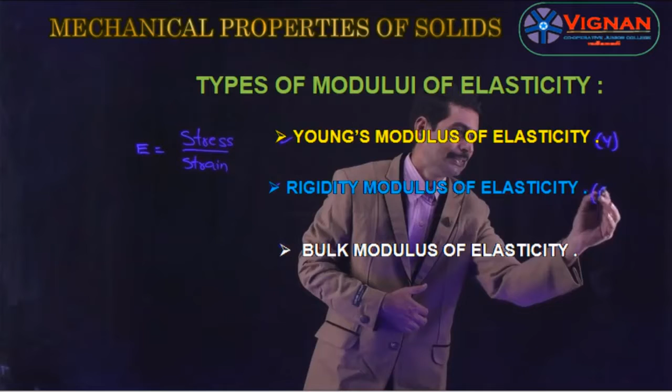There are three types of stress and three types of strain, as we already discussed. Similarly, there are three types of modulus of elasticity: Young's modulus of elasticity, denoted by Y; rigidity modulus of elasticity, denoted by eta; and bulk modulus of elasticity, denoted by B.

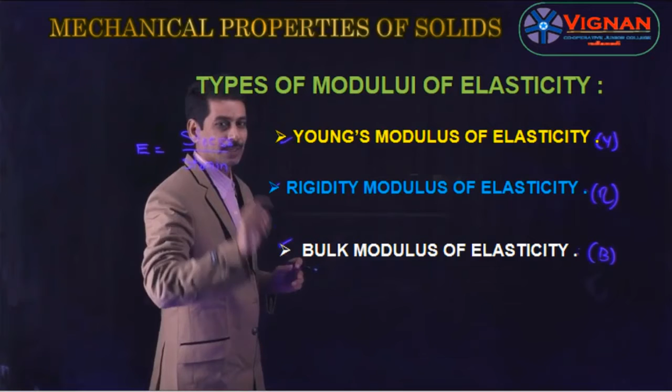Now let us see what is Young's modulus of elasticity, rigidity modulus, and bulk modulus. The first type is Young's modulus of elasticity, defined as the ratio of longitudinal stress to longitudinal strain, denoted by Y. It can also be defined as the longitudinal stress acting per unit longitudinal strain.

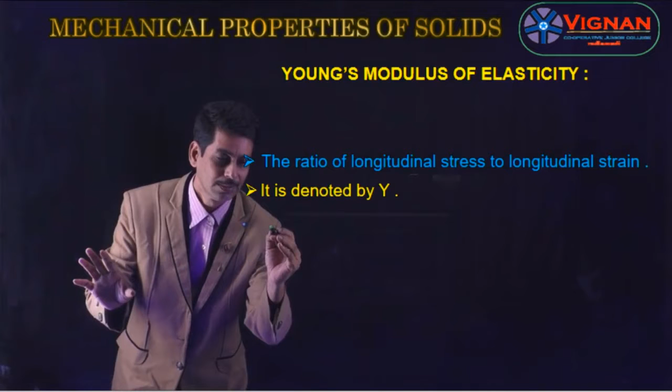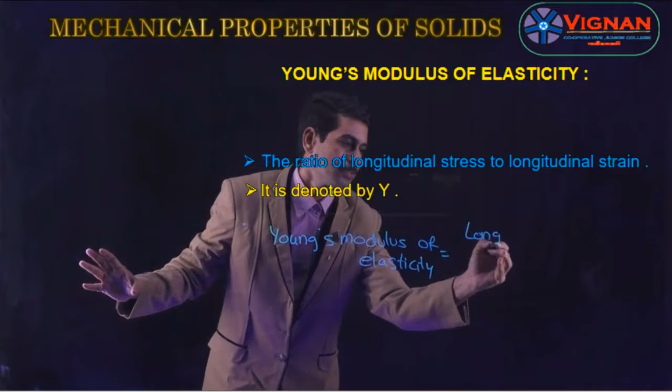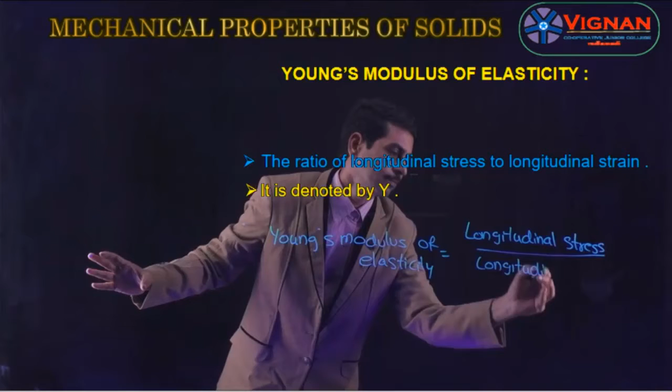So the formula for Young's modulus of elasticity is: Young's modulus of elasticity is equal to the ratio of longitudinal stress to longitudinal strain. This is the expression for Young's modulus.

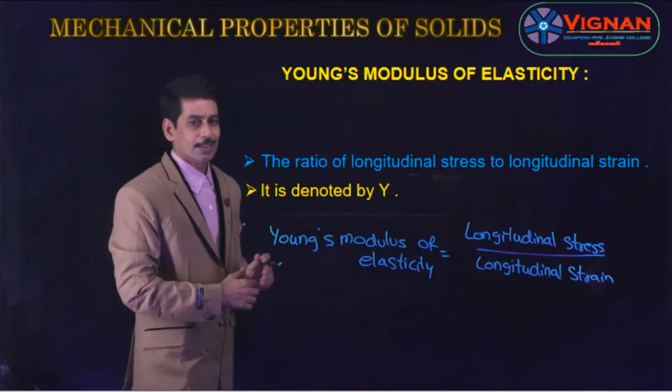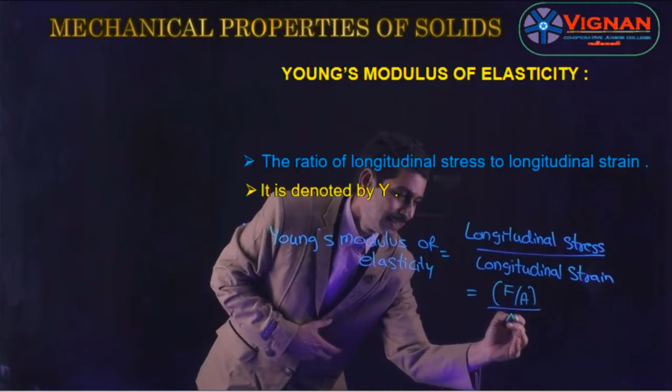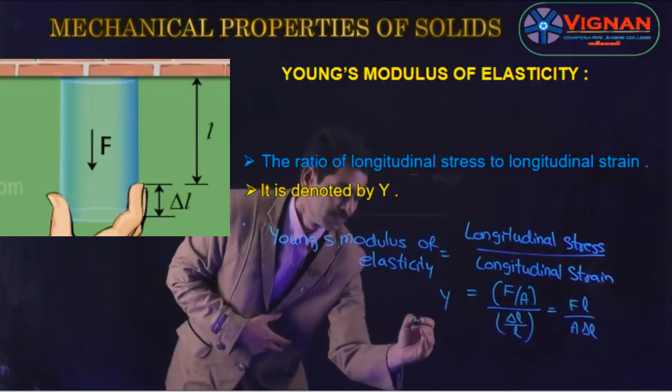Young's modulus of elasticity is longitudinal stress by longitudinal strain. We already learned longitudinal stress is force by area, given as F by A, whereas longitudinal strain is change in length by original length, written as delta L by L. By simplifying it, we get FL by A delta L. So Young's modulus, denoted by Y, is equal to FL by A delta L.

In this expression, F is the force acting on the wire, L is the actual length of the wire, A is the area of cross section of the wire, and delta L is the increased length of the wire. So Young's modulus is defined as the ratio of longitudinal stress to longitudinal strain, denoted by Y, and Y equals FL by A delta L.

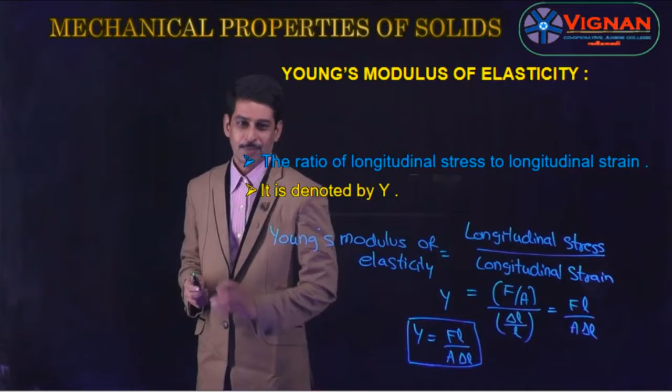In this video we are observing: we apply a force on the wire, where L is the length of the wire, A is the area of cross section of the wire, and delta L is the increased length of the wire.

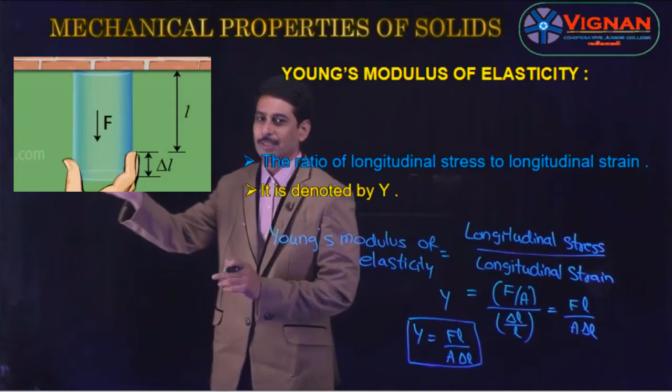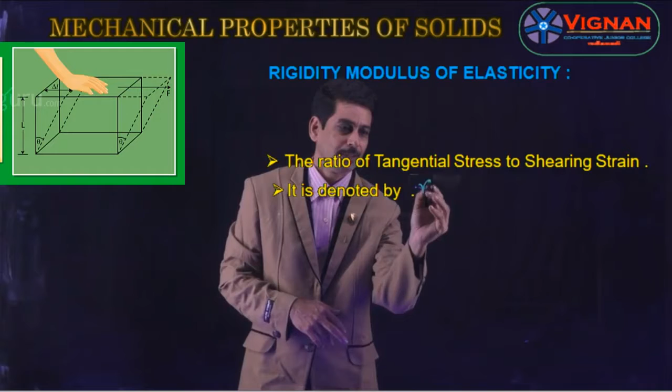The next type of modulus of elasticity is rigidity modulus of elasticity. It is defined as the ratio of tangential stress to shearing strain, and it is denoted by the letter eta.

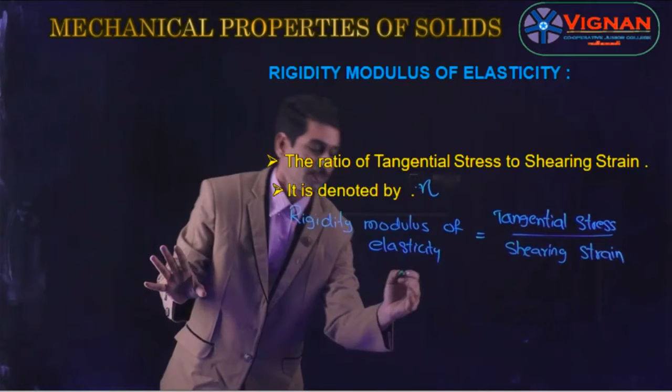The formula is: rigidity modulus of elasticity is equal to the ratio of tangential stress to shearing strain, also called tangential strain, denoted by eta. Tangential stress is given by force by area, whereas shearing strain is given by x by L, which is the ratio of relative displacement to the perpendicular distance between the layers. So we get eta is equal to FL by AX.

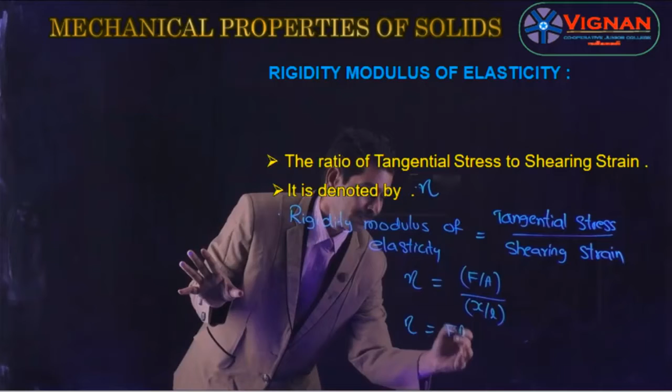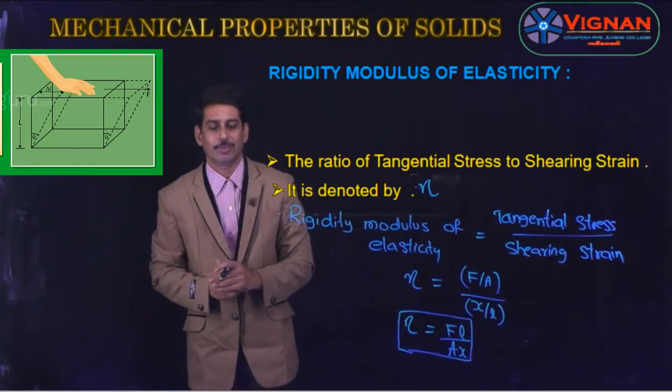This is the expression for rigidity modulus of elasticity. As we see in this video, in this expression eta equals FL by AX, where F is the force acting on the body, L is the length or perpendicular distance, A is the area of cross section, and X is the relative displacement of the body. So rigidity modulus of elasticity is defined as the ratio of tangential stress to shearing strain.

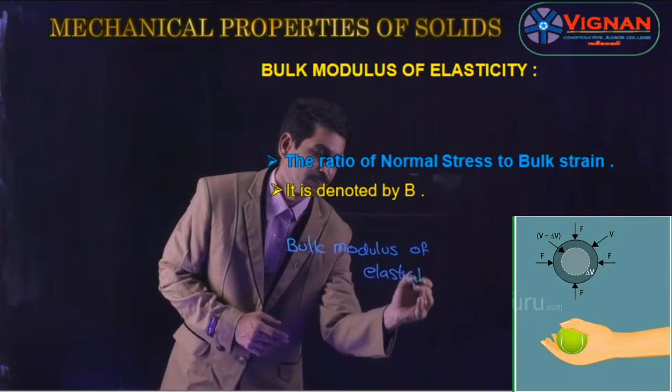The next type of modulus of elasticity is bulk modulus of elasticity. It is defined as the ratio of normal stress to bulk strain, denoted by letter B. The formula is: bulk modulus of elasticity is equal to the ratio of volume stress, also called bulk stress, to bulk strain.

We know that stress is nothing but force by area, whereas strain is delta V by V. But here we get minus because there is a decrease in volume, that's why we get minus. And the bulk modulus is denoted by B, which is nothing but minus.

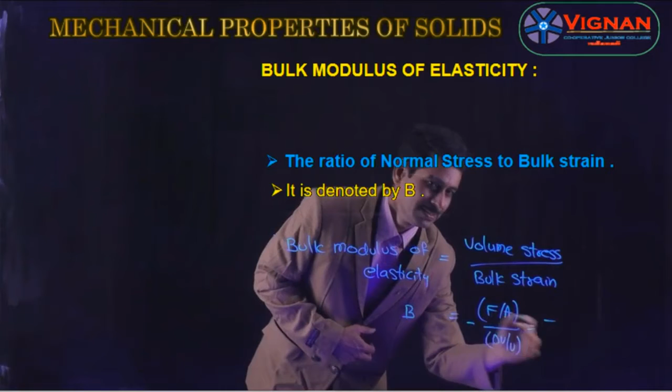So F by A is nothing but pressure, so pressure P, V by delta V. So the bulk modulus of elasticity is given by B equals minus PV by delta V, where the minus indicates that there is a decrease in volume. So this is the expression for bulk modulus of elasticity.

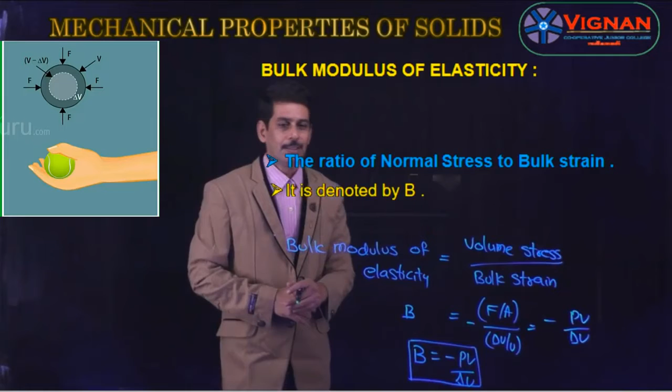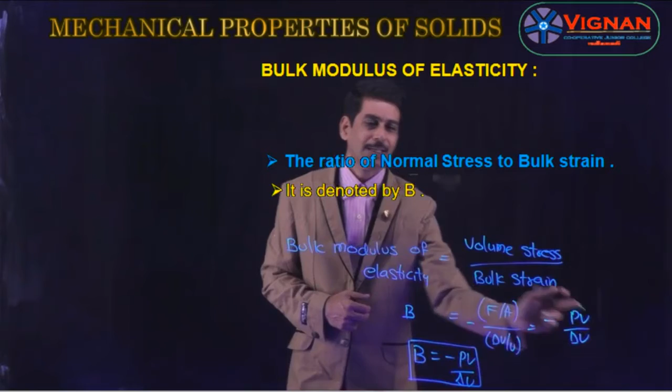Bulk modulus of elasticity is defined as the ratio of normal stress or bulk stress to bulk strain, denoted by B, and B is nothing but minus PV by delta V. Here P is pressure, which is force by area, so F by A can be written as pressure. V is the original volume and delta V is the change in volume.

Next we will see what is compressibility. Compressibility is nothing but the reciprocal of bulk modulus, called the compressibility. It is denoted by C, which is 1 by B, so C equals 1 by B. The reciprocal of bulk modulus is called the compressibility.

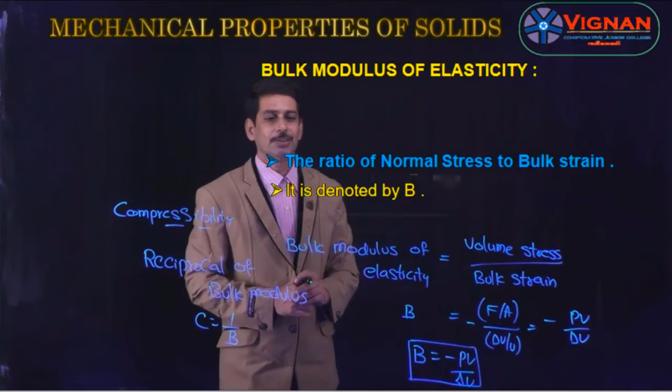So this is about bulk modulus of elasticity. It is the ratio of volume stress to bulk strain, denoted by B, and the expression is B equals minus PV by delta V. Here the pressure is P, V is the original volume, and delta V is the change in volume. Now let us see Poisson's ratio.

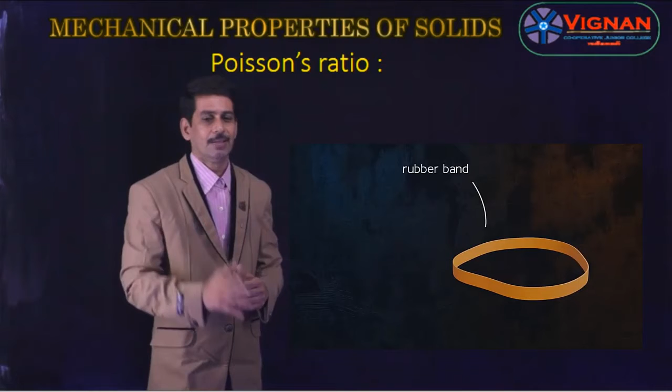In this video we observe that whenever a rubber band is stretched, the length obviously increases and also the diameter of the wire decreases. So whenever a wire is loaded, the length increases while the diameter decreases at the same time. The decrease in diameter is called the lateral strain, whereas the increase in length is called the longitudinal strain.

We observe in the video that we are stretching a rubber band. At the same time the length increases while the diameter of the rubber band decreases, making it thinner and thinner. This shows a lateral decrease, which is the lateral strain. The decrease in diameter or radius is called the lateral strain, whereas the increase in length is the longitudinal strain. So the increase in length of the wire is measured as longitudinal strain, while the decrease in diameter, radius, or area is the measure of lateral strain.

Poisson's ratio is defined as the ratio of lateral strain to longitudinal strain. So here we are observing the definition: it is the ratio of lateral strain to longitudinal strain, and it is denoted by sigma. The Poisson's ratio is denoted by sigma.

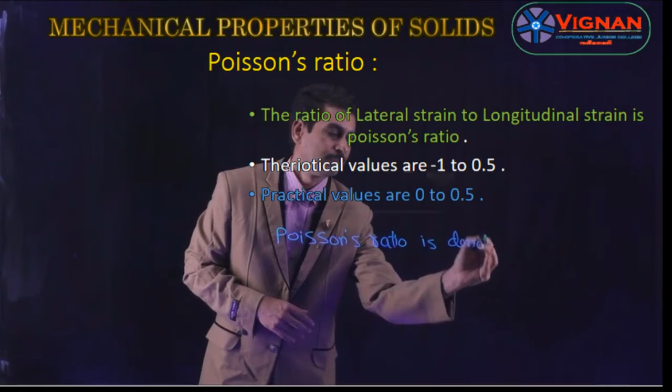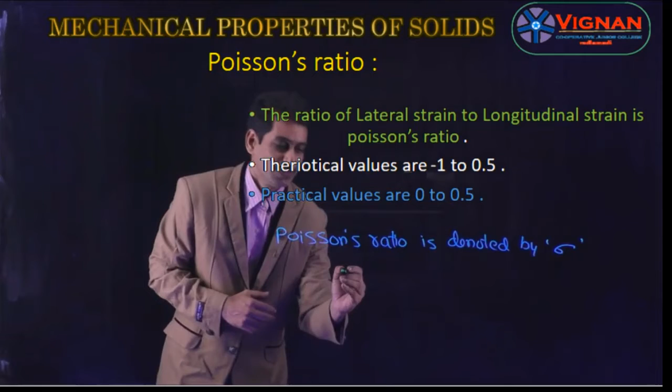This is the letter sigma. So it is defined as the ratio of lateral strain to longitudinal strain, and the expression or formula for Poisson's ratio is the ratio of lateral strain to longitudinal strain. So lateral strain by longitudinal strain is called the Poisson's ratio.

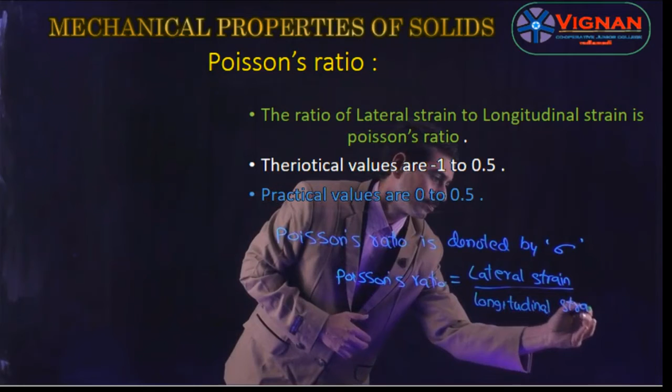Denoted by sigma, sigma equals minus. The reason for minus is that the radius or diameter of the wire decreases, that's why we get minus, divided by longitudinal strain which is delta L by L. So this is the expression for Poisson's ratio sigma.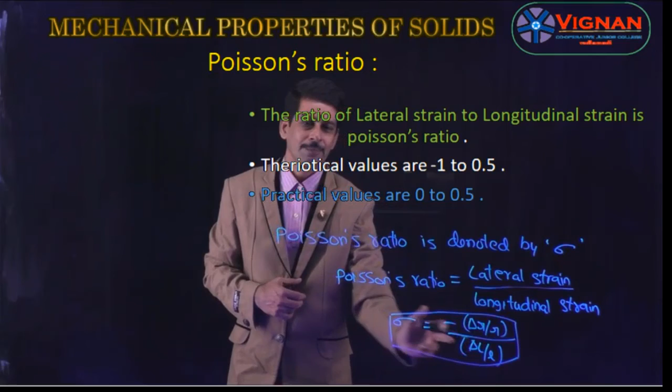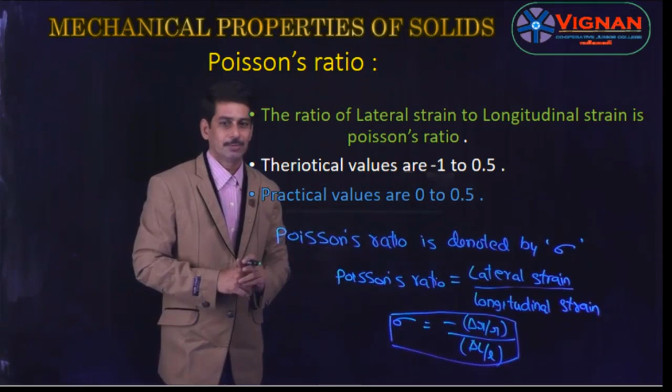Sigma equals minus delta R by R, divided by delta L by L. So Poisson's ratio is defined as the ratio of lateral strain to longitudinal strain, denoted by sigma, and sigma equals minus delta R by R by delta L by L. The values of Poisson's ratio: theoretically from minus 1 to 0.5, whereas practically from 0 to 0.5. These are the values of sigma, theoretical values minus 1 to 0.5, practical values 0 to 0.5.